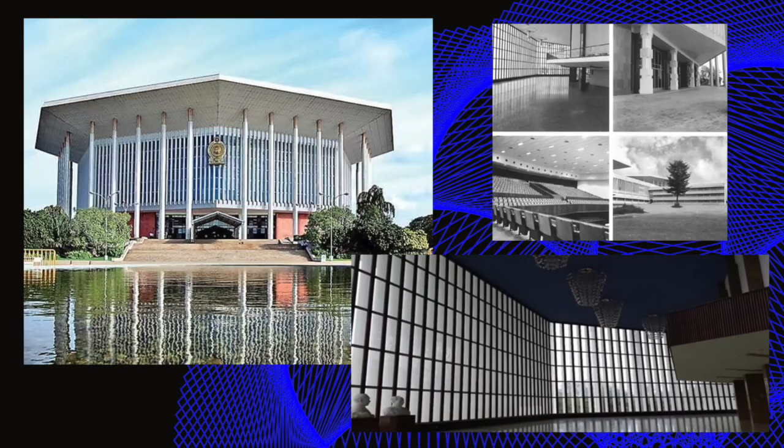His contributions included the Bandaranaike Memorial Conference Hall in Sri Lanka, which uses 40 columns to raise the structure and free up internal space. Later, he further refined this process, with a mere 4 columns supporting the whole structure of a sports complex in Islamabad, Pakistan.

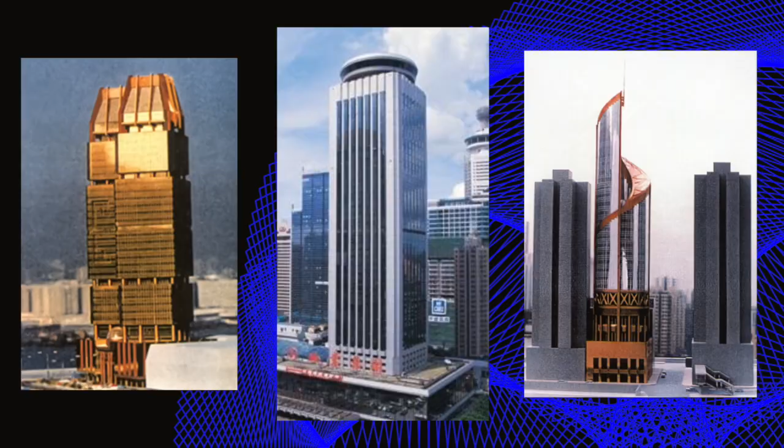All of these designs were in the forefront of new technological innovations in the construction industry, which were subsequently taken up by Daishinjiro in the early stages of his own architectural practice.

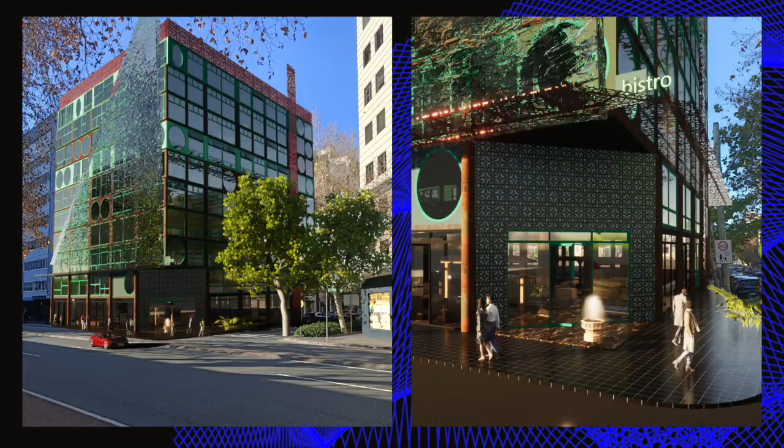Yang Yun joined his son, Daishinjiro, to form Cosmont Design Group, which later expanded to become Cosmont Gibbon Hamor Design Group. Daishinjiro, now the director of Cosmont, is an architect based in Australia, who has practiced in China, Australia, and other countries, and has won several design awards including the design for the 2008 Olympic venue in Nantong.

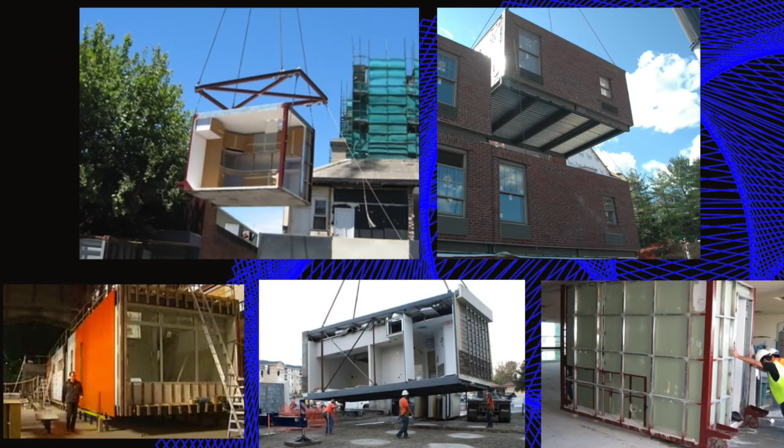His early work and research into modular design for bathrooms and kitchens led to his cooperation with a Hong Kong manufacturer to install modules in a 12-story project in Newcastle, and a proposed design for a modular-built airport at Badgerys Creek, Sydney. Cosmont are now collaborating with China Construction Shenzhen Decoration Company Limited and Fabry Proprietary Limited, a building technology company, to manufacture and bring their Cosmodular technology to a wider market.

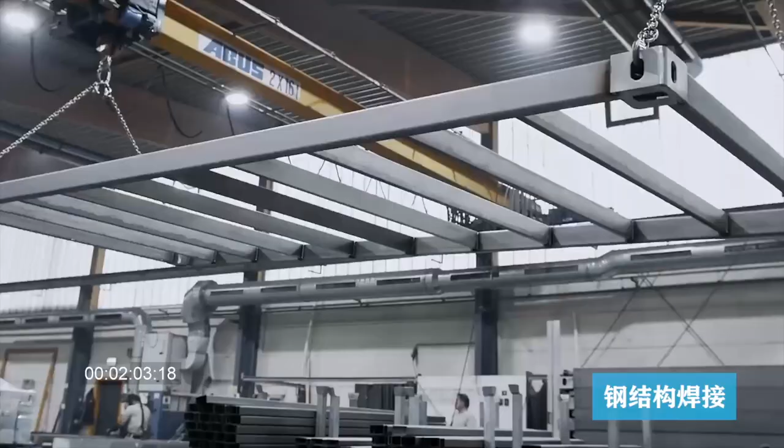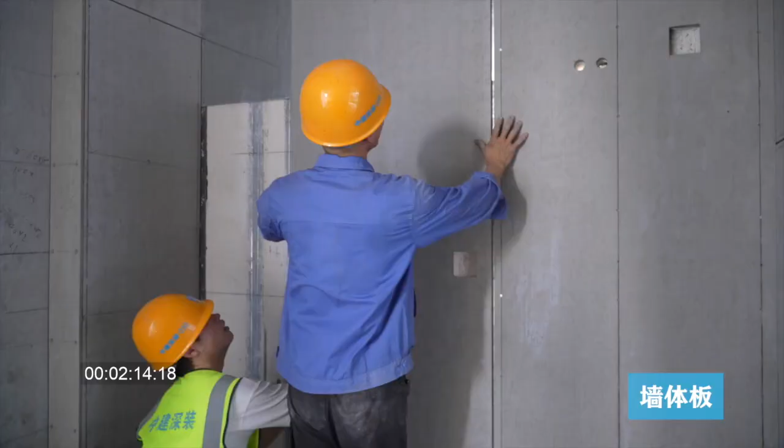The Cosmodular system is a prefabricated, green, low-carbon, intelligent, steel-structured, modular building product. Cosmodular's unique autolock system allows modules to be used either to construct permanent buildings, or to be installed as temporary structures. The modules can be added or removed according to functional requirements.

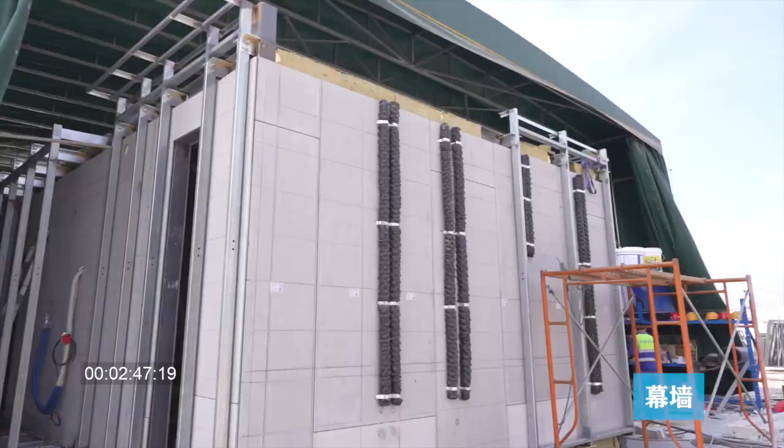In relation to hospitals, for example, those built using the Cosmodular system can provide the full range of services during normal times, but during times of high demand when a quick response is required, additional modules can be added to fulfill specific needs, such as isolation units, operating theaters, clinics or wards. When no longer required, these modules can be removed and used elsewhere.

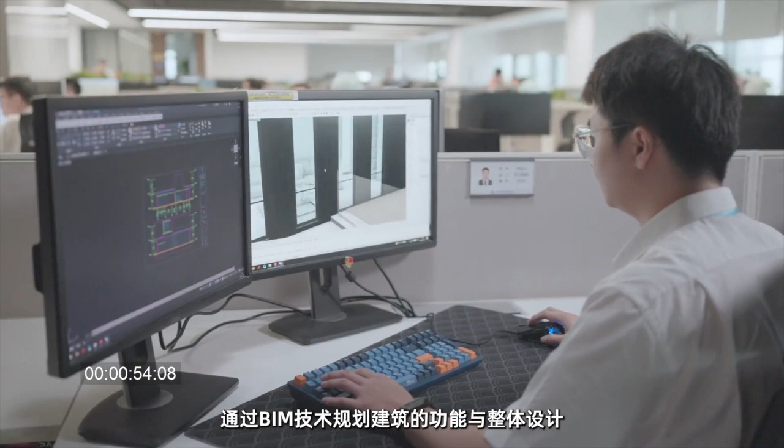This is a cost-saving measure that not only saves environmental resources, but also saves time, as the modules are already constructed and only need modifying.

Our team uses a brand new design concept to plan the function and overall design of the building through BIM technology, which can effectively solve the area limitation of the assembly units model, and innovatively extend the indoor dimensions and outdoor living space through good, sympathetic architectural design.

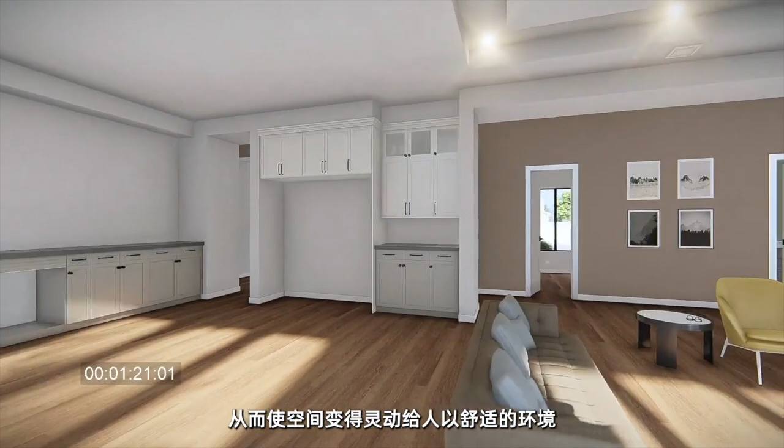It not only allows for personalized customization of a single module, but also permits creative 3-dimensional space combinations of multiple modules, providing flexibility of function and a comfortable work or living environment.

Our team relies on the BIM Full Cycle Management Platform and BIM Digital Processing Platform to open up the information path of design, production, and construction.

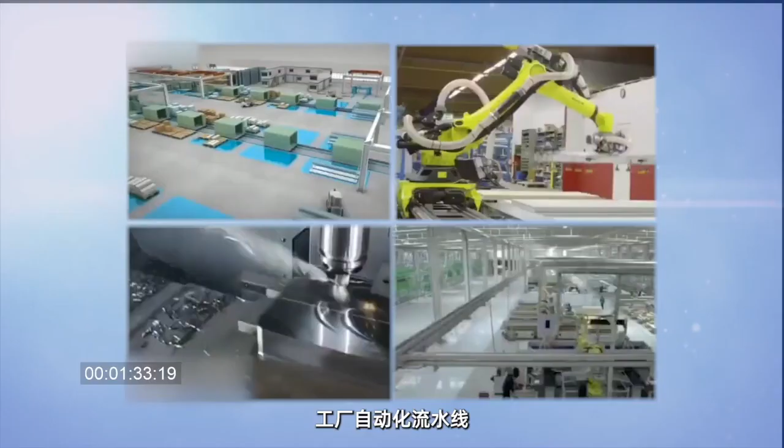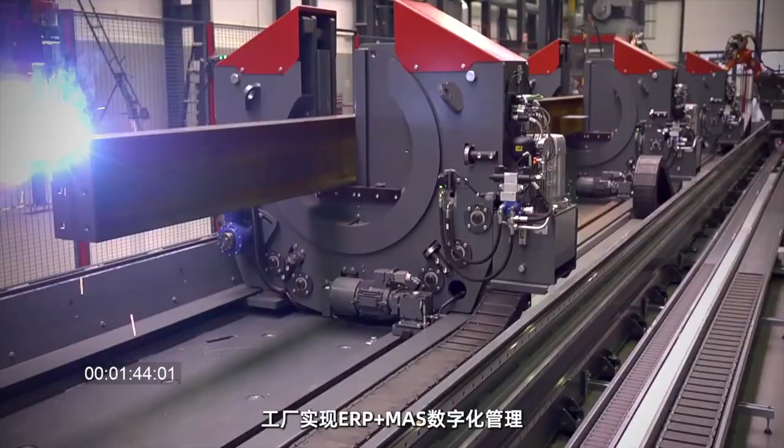The application of a factory automated assembly line not only ensures the accuracy of construction products, improves products, and reduces overhead costs, but also enables businesses to achieve in an orderly manner their scheduling, materials, and ERP plus MAS digital management costs.

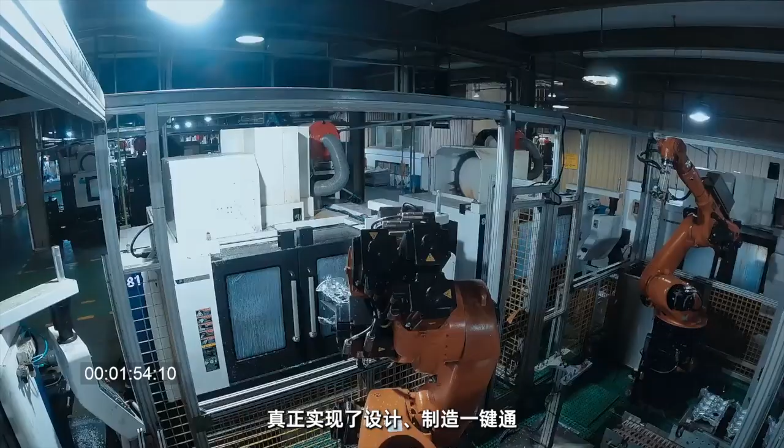The BIM Plus plugin developed by our R&D team truly realizes what was once a high-tech fantasy of design, manufacturing integration, and a rapid construction time when placing orders.

In the world of today, the research of new building systems and new materials is directed towards the overwhelming need for green buildings. Our team welcomes the establishment of esteemed leading scientist Meng Jinmin's Research and Development Department within the China Construction Shenzhen Decoration Company Limited.

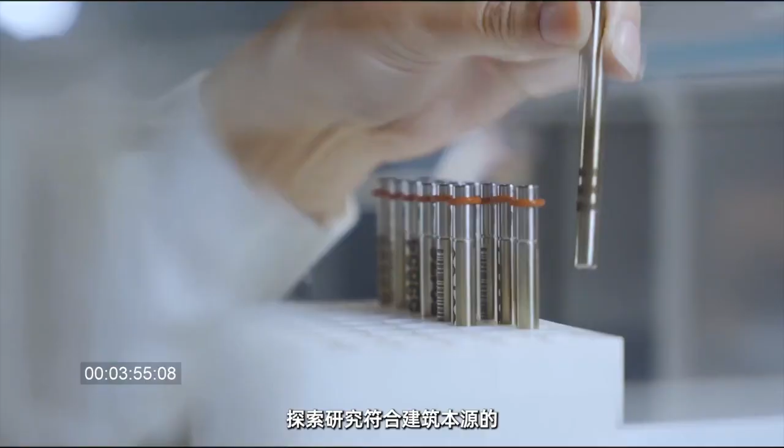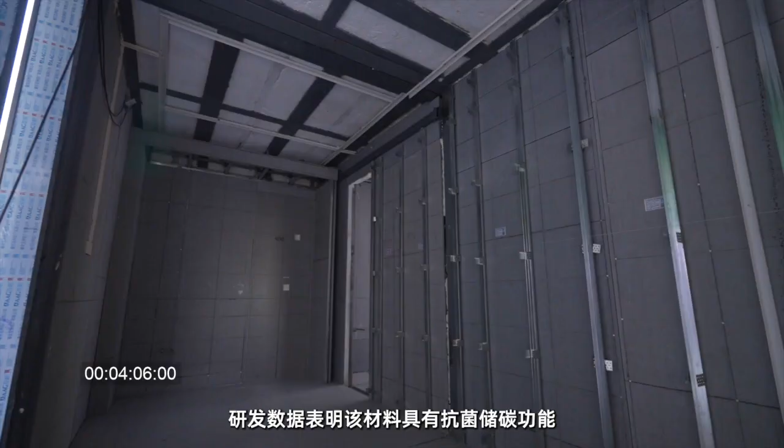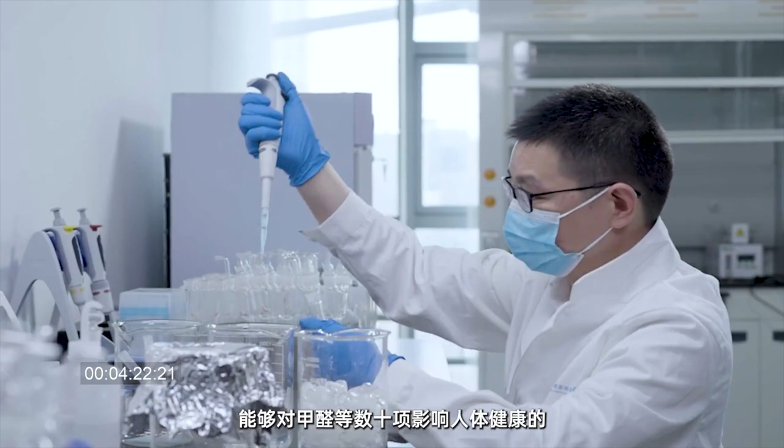Our R&D data reveals that the materials used have, among other benefits, the function of antibacterial carbon storage, which can realize our green and low-carbon goals for modular building and interior design. And since the modules can be reused, this greatly reduces the waste of natural resources.

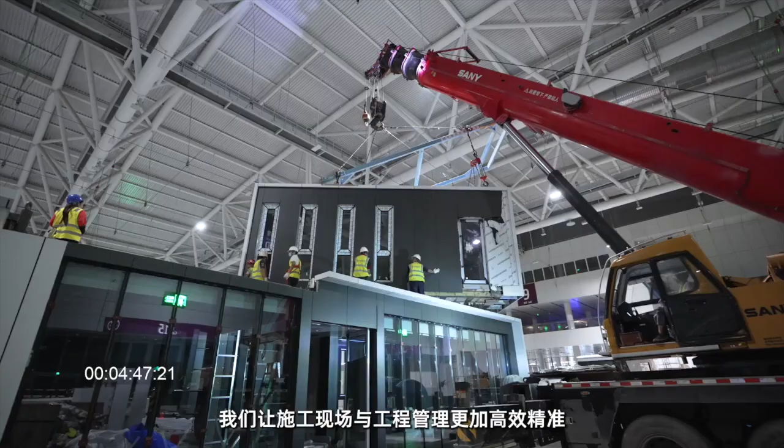Our team cooperated with Tsinghua University to set up a green building and interior design health laboratory, which can monitor the whole process of dozens of indoor air indicators that affect human health, such as formaldehyde and carbon monoxide.

It has developed a green and healthy interior design pre-assessment system, an interior decoration materials library, and established an environmental testing warehouse which conducts full-cycle early warning and testing of buildings and materials used in green buildings and interior design.

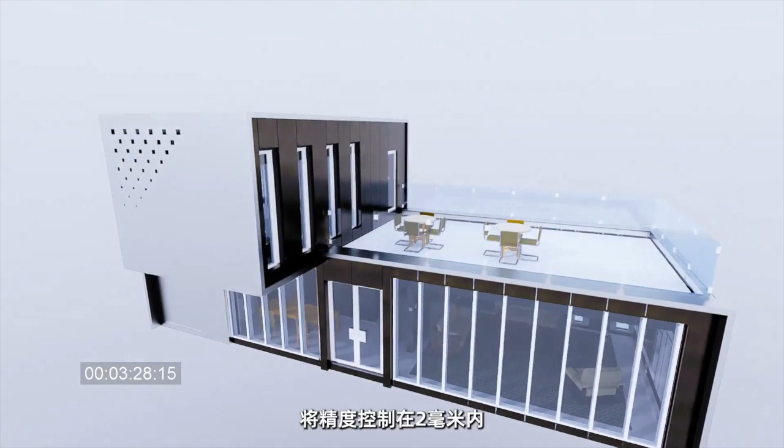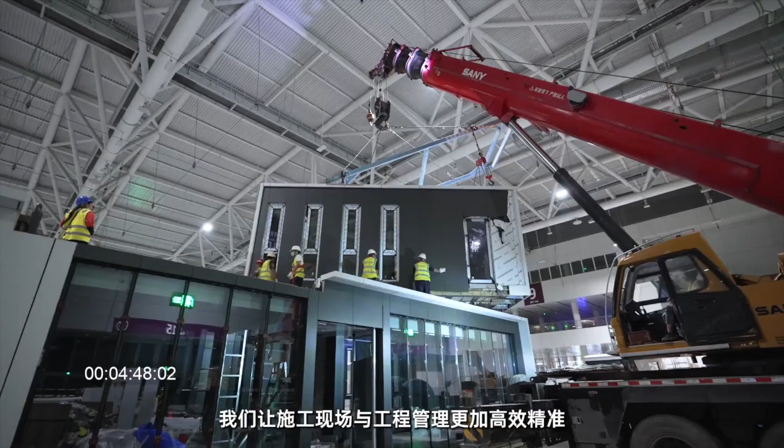The whole process of production, processing and assembly is carried out in the factory. The largest single module is 12 meters long, 2.6 meters wide, 3.3 meters high, and weighs 15 tons. The assembly of the modules can be realized within 2 days.

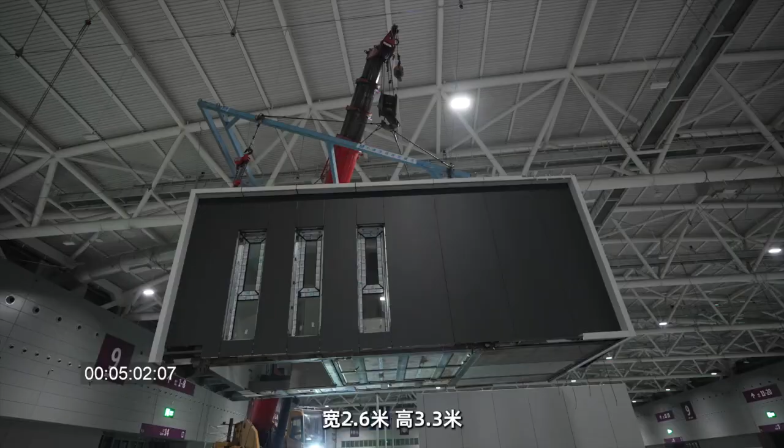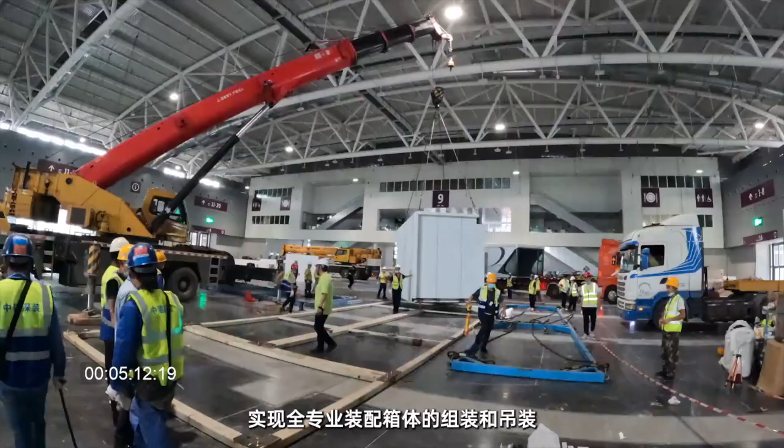We use industry-leading, ultra-high precision assembly technology and a vertical cone socket positioning system to support the 4 beams and 8 columns of the fully professional assembled building. This allows us to control the accuracy within 2 millimeters.

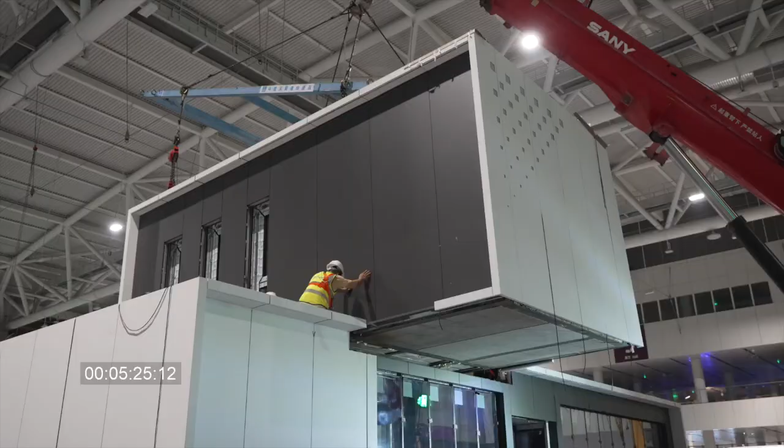As the factory is undercover, it is protected from weather, and 95% of the assembly is done on the factory floor, which greatly reduces the risk of outdoor aerial work for workers. The revolutionary changes in structural connectors extend the integrity of both indoor and outdoor buildings and improves efficiency.

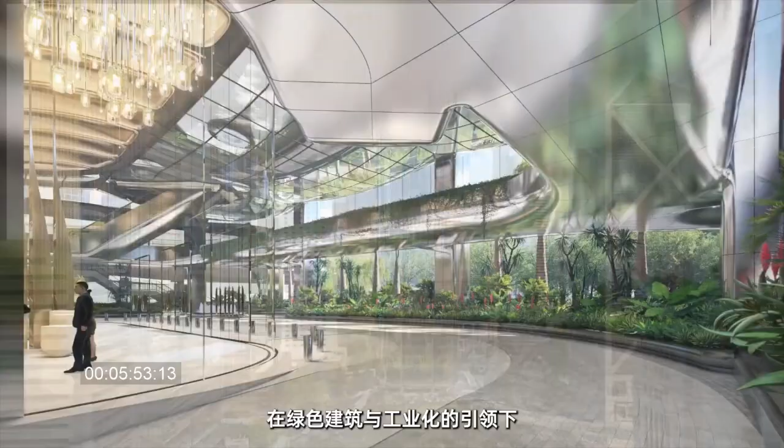What will the architecture of the future look like? With the aim of green building with industrial efficiency, CCSZD and Cosmont will bring architecture back to its origin and serve the lived experience. Our team will continue to explore the application and practice of prefabricated buildings, promote intelligent prefabricated design, and contribute to a green, safe, and comfortable world.